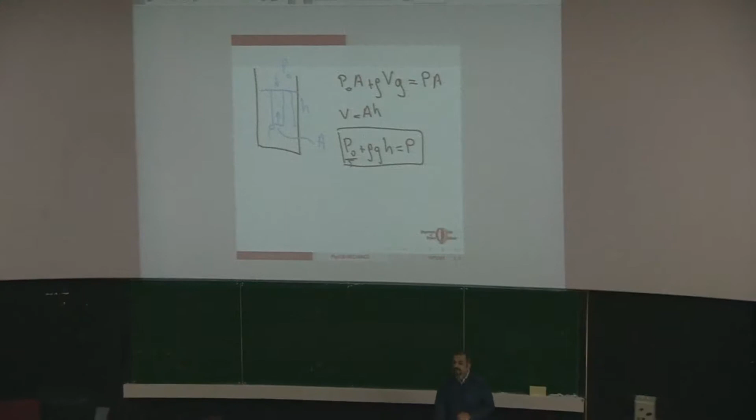Any questions about the things we have done on Tuesday? Remember, we started studying fluid dynamics. We started with some simple stuff. We had mainly dealt with the pressure, what we mean by pressure, what is the definition of pressure, how we can calculate the pressure, and then we had some applications of the pressure, like the buoyancy. Why do objects float on liquids?

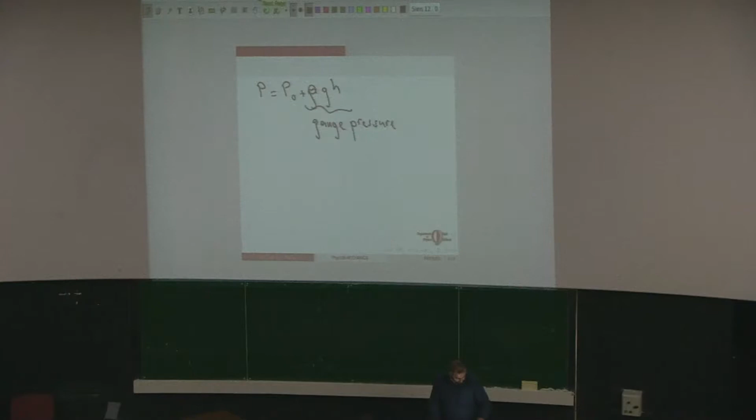And we calculated that, for example, a typical aquarium, a large one, does need to support hundreds of kilos. And then we discussed the buoyancy, why do objects float, how do ships work.

Did anybody go to the civil engineering department to see the boat made of concrete? Well, we had some architects in the classroom, even they didn't go apparently.

Okay, so today I will try to cover mainly 2 subjects. One is the hydraulics. So if you are driving a car, unless you are driving a car from the 60s... did anybody drive a car from the 60s or even from the 80s? So you drove, okay, so you are quite familiar with the cars.

If you have driven a car from the 80s, my father-in-law has a car from the 80s, it is as good as going to the gym, because your muscles have to work a lot. You are doing the actual muscle work to rotate the wheels in the car. But in the newer cars, you can just rotate the wheels with the tip of your finger. It's so easy to rotate them. And the reason is the hydraulic system.

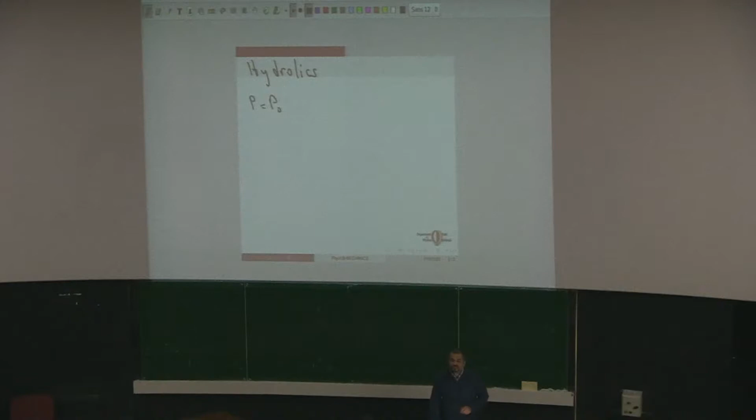We had already covered the basic idea. We had seen that the pressure in a fluid is always the pressure at some reference point plus the density of the liquid times the gravitational acceleration times the difference in the heights of your reference point and the point at which you are calculating the pressure. And it is actually the height. These 2 points can be at completely different points. They don't have to be at the same horizontal position. One can be here, the other can be right over there.

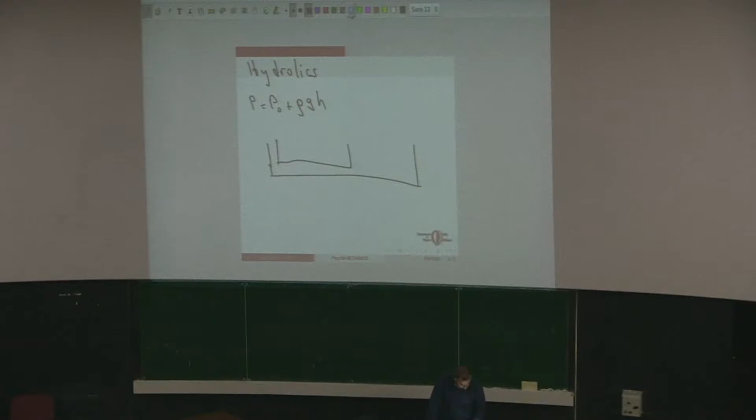So imagine such a system, and it is filled with liquid. This is your liquid system. Let's just assume that they are at the same height. They will be at the same height in equilibrium.

Now, take this point and this point, let's call this point A and this point B, and consider the points on the opposite side. Let us call this point C and this point D. Let's assume the differences in the heights of points C and D and A and B are equal. This is H, and this is also H. The differences in the heights are the same.

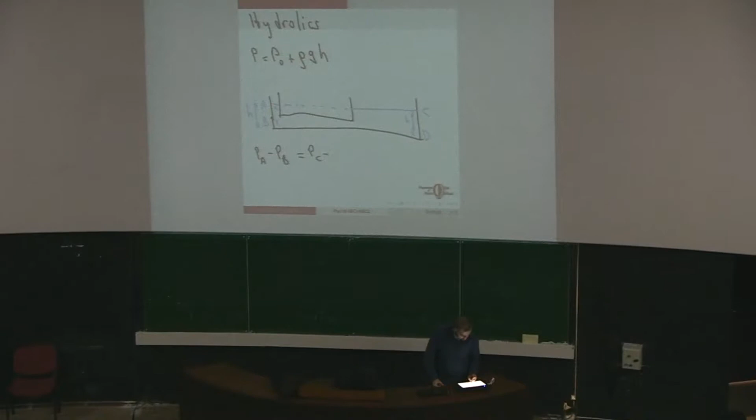Now, we know that the pressure at the point A minus the pressure at the point B, remember the difference in the pressure at two different points is always given by H, the difference in the heights. So this difference is equal to the pressure at the point C minus the pressure at the point D. Since the difference in the heights of this point and this point is the same as the difference in the height of this point and this point, PA minus PB is equal to PC minus PD. The pressure differences are the same.

But we also know one more thing. Remember, you can just imagine this block of liquid. I'll just imagine this is a horizontal line. Just imagine that the bottom part of this liquid is also horizontal. So this block of liquid is horizontal. It is not moving in the horizontal direction. So the force at this point and the force at that point should be equal. But that means the pressure at this point and the pressure at the other point has to be

equal. So we also know that pressure at the point B should be equal to the pressure at the point D. B and D, they have to be equal. So this equation tells us that the pressure at the point A and the pressure at the point C are also equal.

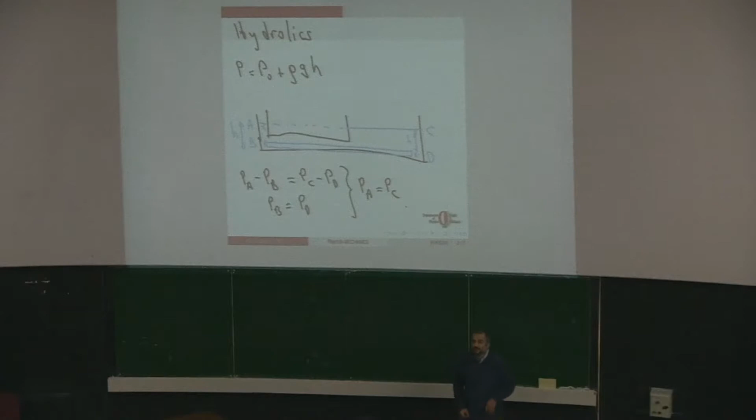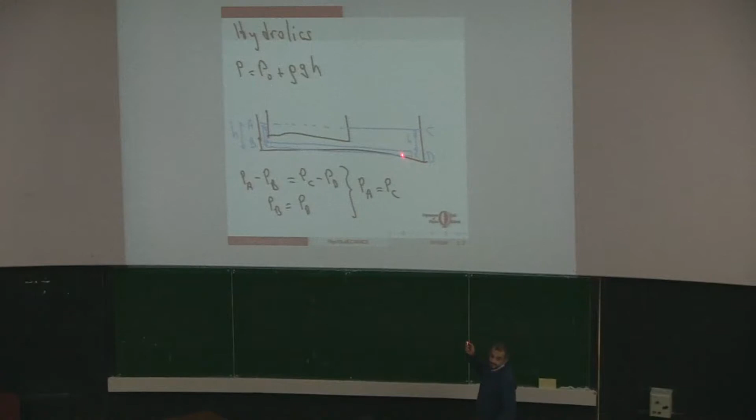Well, what we are essentially doing is to show such an identity. You just start from the point A, you imagine such a block, and relate the pressure at the point A to the pressure at the point B, and then you use this block of water to relate the pressure at the point B to the pressure at the point D, and then you use the last block of water to relate the pressure at the point D to the pressure at the

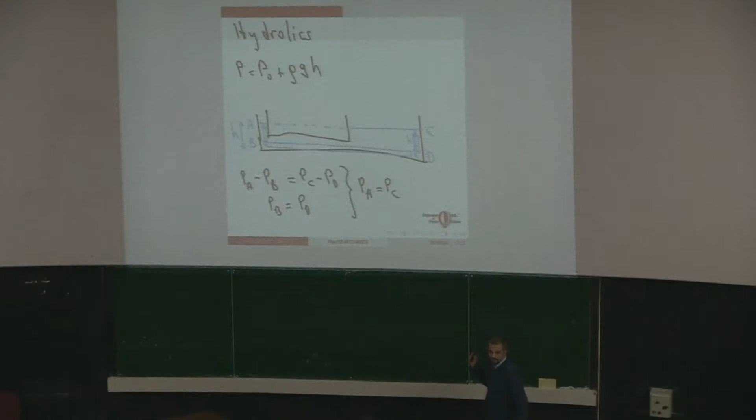point C. So as long as two points are connected by some water, as long as you can swim from one point to the other point through the water, it just means that the pressure difference is only determined by the difference in the H. One point can be here, the other point can be over there. There's no problem with that. Okay, although it seems kind of obvious, it will have important consequences.

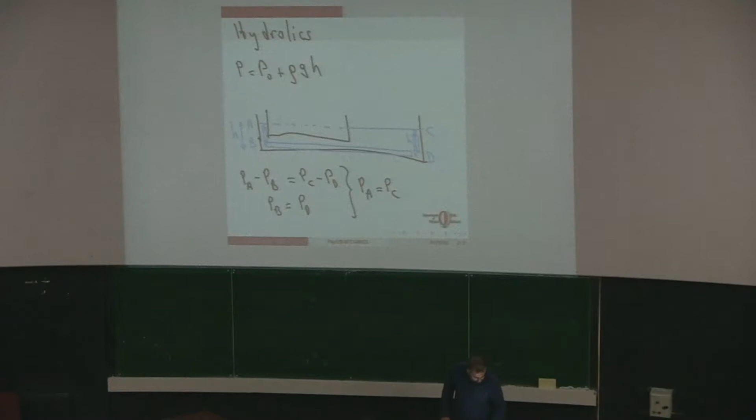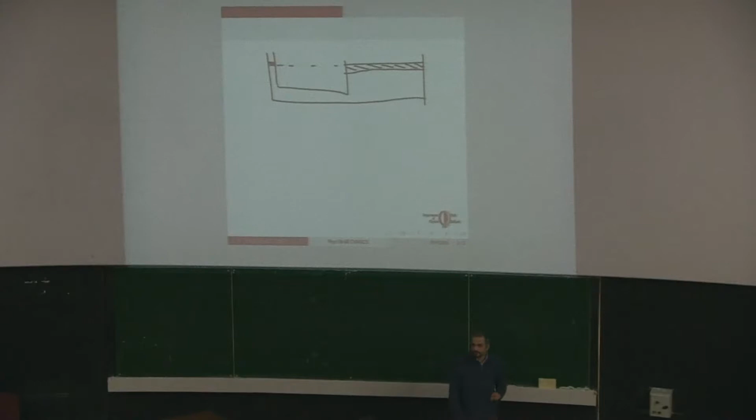So let's just take this example. So you have a small opening and a large opening. They are both connected by a fluid. So you imagine that you have a piston over here and another piston at the same height. So they are both at the same height. It is filled with liquid.

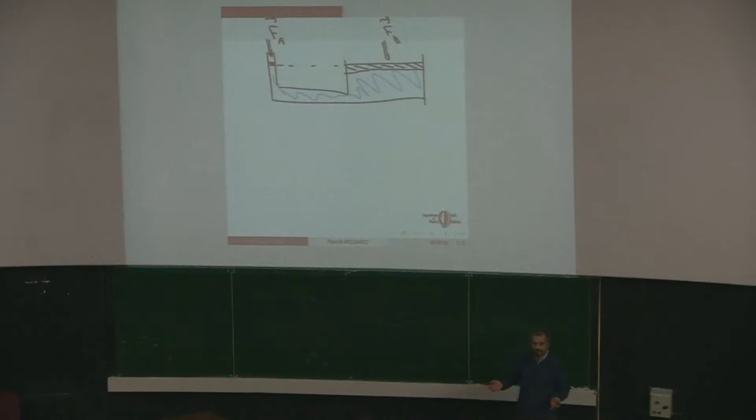And let's say you apply some force over here. And you exert another force on the other side, and let's just assume that these two forces are balanced. So the system is at rest when you exert a force Fa on the left-hand side and you exert a force Fb on the right-hand side.

Now remember, the pressure at any point is always P0, the reference pressure, plus rho g h. Now in this case, h is 0. So we will just set this point to have h equal to 0. So this term is 0. So the pressure at that point is just the reference pressure. The reference pressure, we have the atmospheric pressure.

So this is the additional force that we are exerting. There is the atmospheric pressure, which will exert some force, plus we are pushing it down by some additional force, Fa. The same holds over here. There is the atmospheric pressure plus this additional force, Fb. Now, Fa will increase the pressure over here by Fa over A1. Let's just call it the area 1. Okay, this has area A1, and this piston has area A2. So this is the system we have.

So if you imagine this system, now Fa over A1 will be the increase in the pressure of this point, right below this piston. But if the system is balanced, everything is at rest, the liquid is at rest. Now if the liquid is at rest, the pressure at this point and the pressure at this point should always be the same. If we are increasing the pressure over here by applying a force Fa, that increases the pressure here.

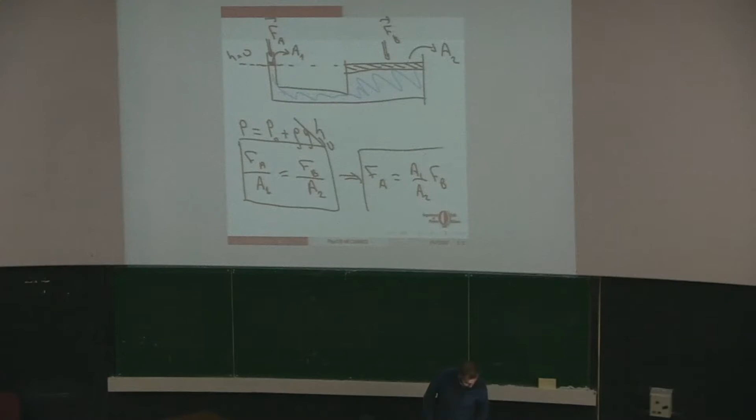Now, if we want to keep the system at rest, we should exert some force over here, Fa, and Fa and Fb should be related in this form. So this, you can imagine, is your load, and this is the force that you exert. So the force that you need to exert, Fa, should be equal to A1 over A2 times Fb. This is the force you need to exert. Now, the Fb is your load. There might be several different loads.

That's not something that you can really control, but when you are devising such a system, A1 and A2 are the things that you can control. And you might make sure that A1 is a small area, A2 is a large area. You can construct your system in such a way that the force that you need to apply to balance an object can be much smaller than its weight. Now this is the critical thing over here.

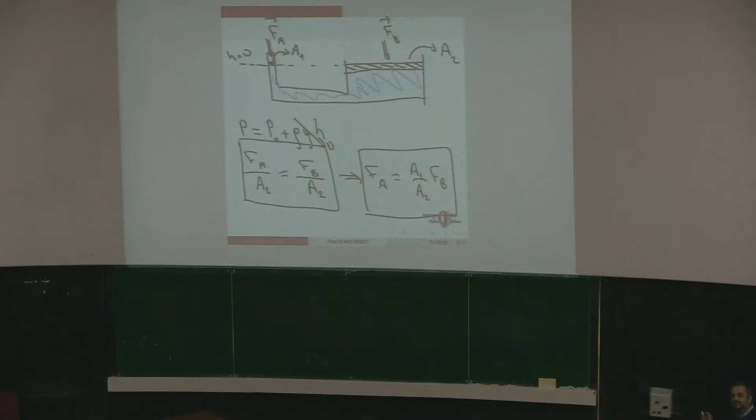So it might be that here you have, let's say, an object that is 100 kilos. You need 1,000 Newton to balance it. If the ratio of these areas is 1 to 100, if you just put 1 kilo over here and 100 kilos over there, they will just balance each other. So it is just a lever system. If you remember, in the lever system, if one side is very long and the other side is very short, with a very small force on the long side you can lift a very heavy load on the short side. This is exactly the same system. You have a short side and a long side.

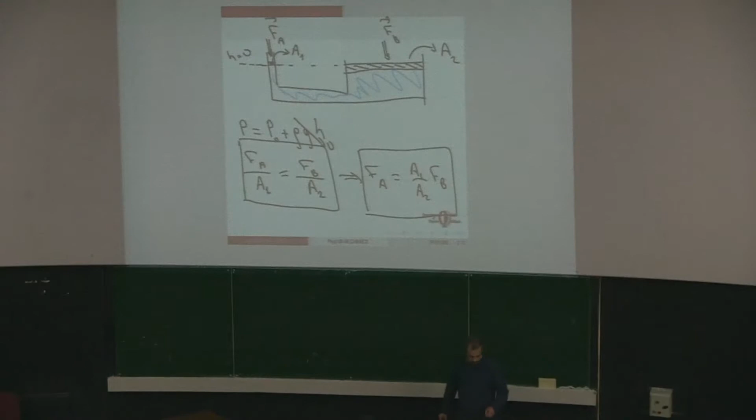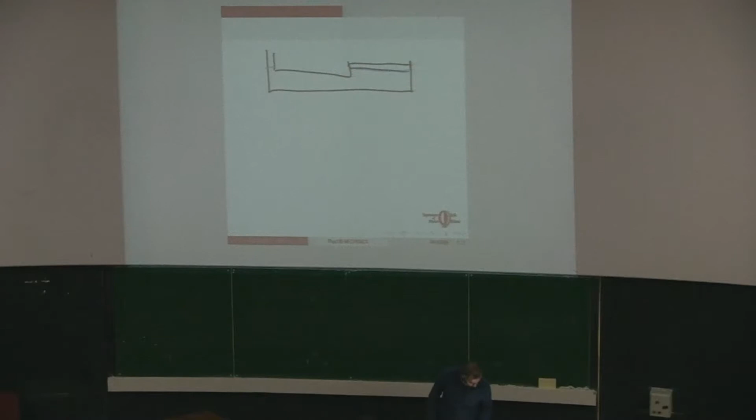Of course, if you want to lift the car by 10 meters, just imagine you have this system. So you have this system filled with liquid. You have pistons on top. This area is A1, this area is A2, and A1 over A2 is equal to 1 over 100. Now, in this case, if you put a load M2 equal to 100 kilograms, and here you put another load M1 equal to 1 kilogram, the weight of 1 kilogram will balance the weight of 100 kilograms.

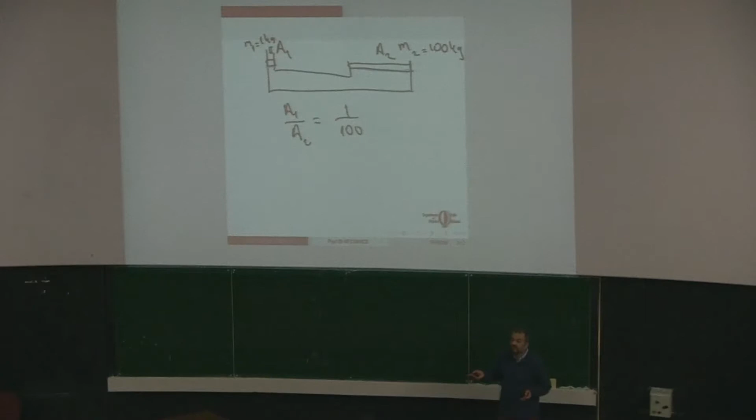But there is a price you pay. If you want to lift the second mass by 1 meter, you have to push this first mass 100 meters. You are exerting a smaller force, but you have to displace it much further if you want to create some displacement on the large mass. It is just the conservation of work, the conservation of energy. The work that you do here and the work that is done here should be equal. If you are exerting a force that is 1/100th of the other force, then the displacement you need is 100 times more. Okay, any questions on this one?

Now, this subject I would like to pass fast, because there is another subject which I would like to cover, which is more interesting and a bit more complicated. This one. Then this will move by 100 meters. Yes.

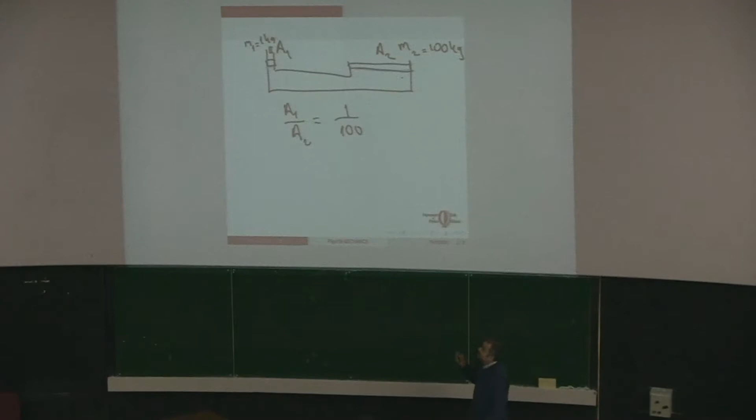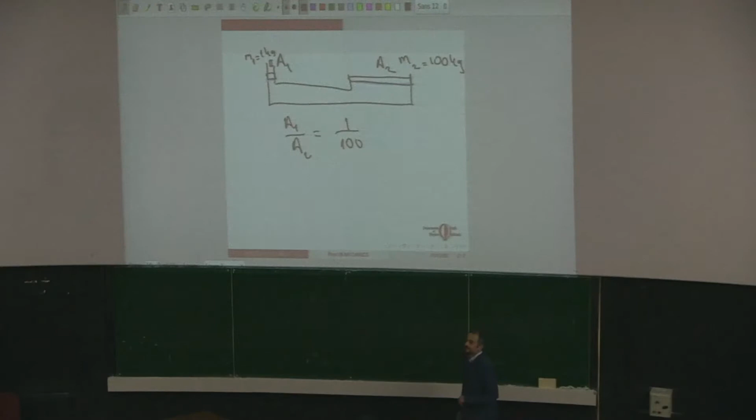Now, up to now, we have always dealt with liquids at rest, or almost at rest. In this case, if you are pushing this, of course, the liquid is not at rest, but it is moving very slowly. Now we will start the subject: what happens if the fluids are not at rest? Now, in this sense, is air a liquid or a gas? In some aspects, it's a gas. In some aspects, it behaves like a fluid. So let's first discuss the fluid aspects.

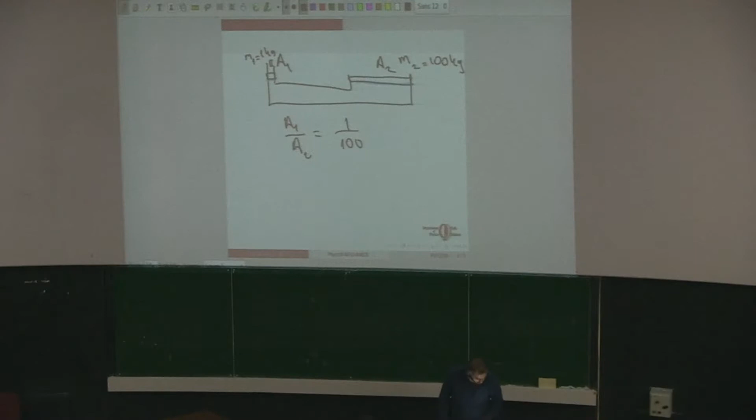Ooh. Okay, so let's see how my internet connection is.

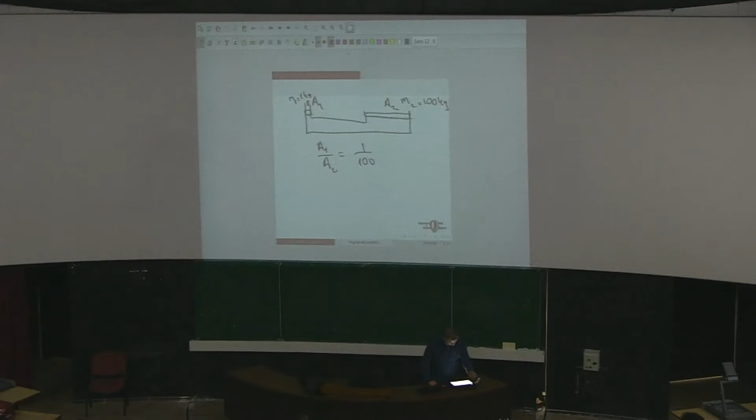So let's see. Now, first let's start: what is laminar flow? We had seen an example of a laminar flow versus the turbulent flow. I'm not sure that this is the right way to spell it.

So for those who have taken an airplane... is there anyone of you who didn't take an airplane yet? Okay, are you afraid of flying? Well, I am.

But there are some moments while you are flying that the plane just falls. As you are flying smoothly, suddenly it is as if the plane is making some free fall downward. It falls a few meters. That is also called turbulence, because while there is a laminar flow, there is a lift, a force pushing the airplane upwards. But when there is turbulence in the air or caused by the plane, that force drops significantly and you start dropping until you leave the region where the turbulence is.

And you might have also realized that turbulence happens most frequently when there are clouds around, because the clouds modify the homogeneity of the atmosphere in that region, and that usually causes the turbulence as you are moving. The properties of the atmosphere around you are changing, so the force acting on you is changing. That's why you get all this turbulence and you just jump up and down.

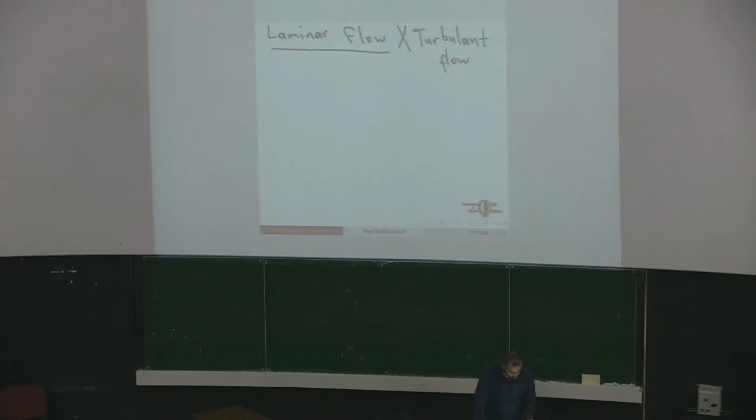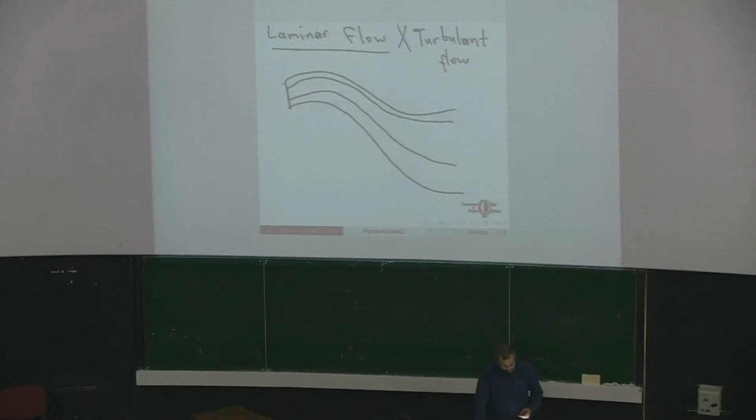Now let's just talk about the laminar flow. If you put some fluid over there, it will just flow smoothly to some other point. If you put some other object over here, it will flow smoothly. It will not intersect the first one. Or you put another object over here, it might flow smoothly and come over there. Another object might flow smoothly and come over here. So if you imagine that you started from this line, you might end up having your objects lying on this line.

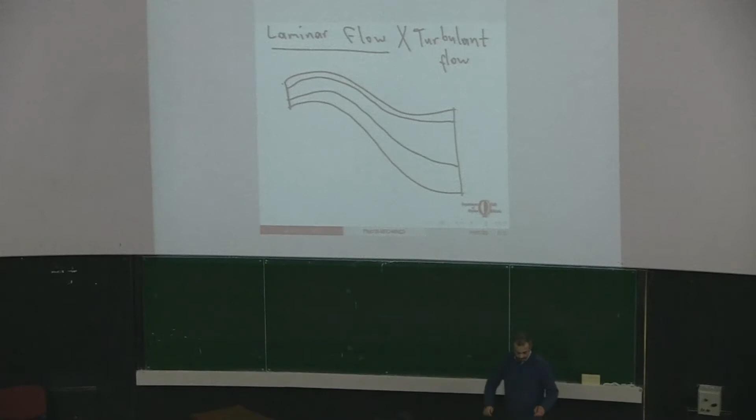The area might change. You see, you might put objects very close to each other, covering almost an area in the fluid. And as the fluid moves, those objects can move away from each other, and the area might enlarge if the flow is in this direction. Let's say the flow is in this direction. This is the direction of the motion of your objects.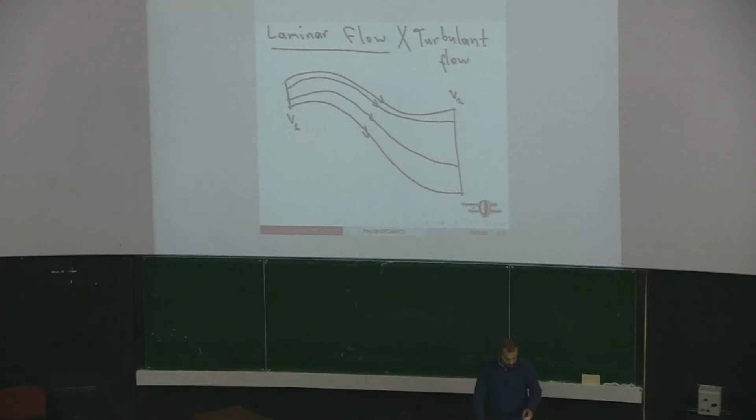Now here, the fluid might have some velocity, some speed v1, and on the other side, it might have some speed v2. The speed of the liquid need not be the same throughout the fluid. Now the area here is, let's call it A1, and the area on the other side is A2.

Now just imagine a very small amount of time. So in this very small amount of time, what will happen is this area, if you just put some specks over here, it will just move a very small distance. So it will come to this point. And this is the volume over there. Now the length, let's call it L1, is nothing but V1 times dt in a very small amount of time.

Now if you consider the other side, this side will move in this direction, and the thickness of that side will be just V2 times dt in the same amount of time. So this part moves over here, this part moves over there. But the mass, so let's see, if you just take this area, this volume, now the mass that comes in should be equal to the mass that goes out.

We are of course assuming that, well, since these lines cannot disappear, they cannot cross each other, the mass here should be always constant. So the mass inside has been increased by the mass over here, and it has been decreased by the mass over here. If there's mass accumulation, then the question is for how long will the mass accumulate? If the mass is constantly increasing over there, eventually you will have all the mass of the universe inside.

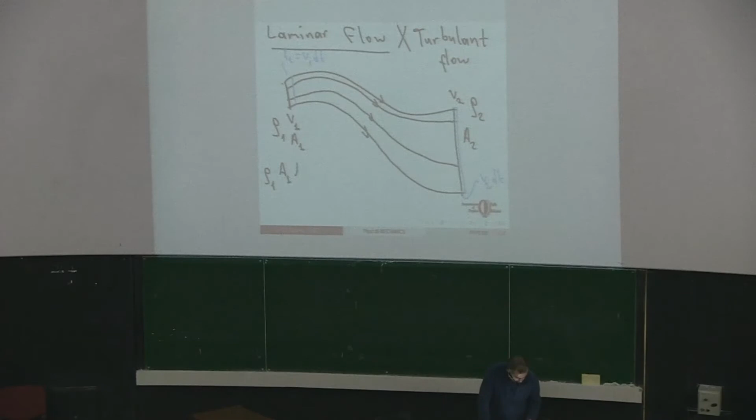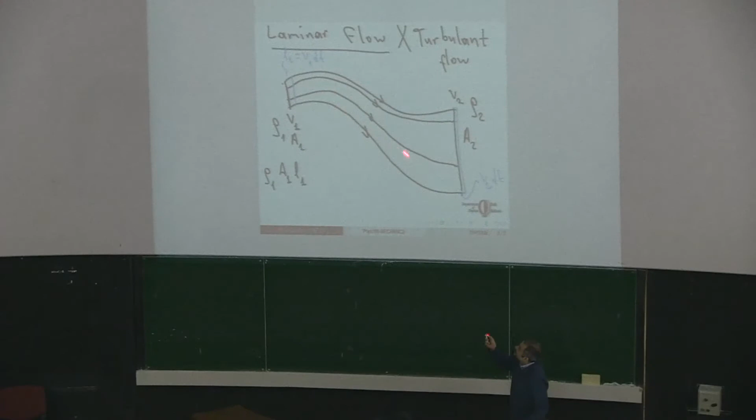Now ρ1 times A1 times L1. A1 times L1 is the volume over here. The volume times the density is the mass. So this is the mass over here, the mass that enters into this region. And the mass that leaves that region is ρ2 A2 L2. So these two things have to be equal. This is what we call the continuity.

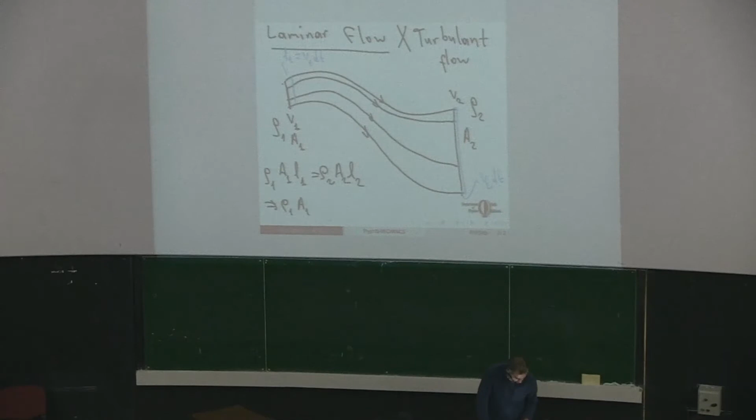Well, L1 is V1 dt, and this is L2, V2 dt. So this means that ρ1 A1 V1 should be equal to ρ2 A2 V2. This should hold as long as the liquid is flowing in a stationary state. The liquid is not changing in time. There is no accumulation of mass at any point.

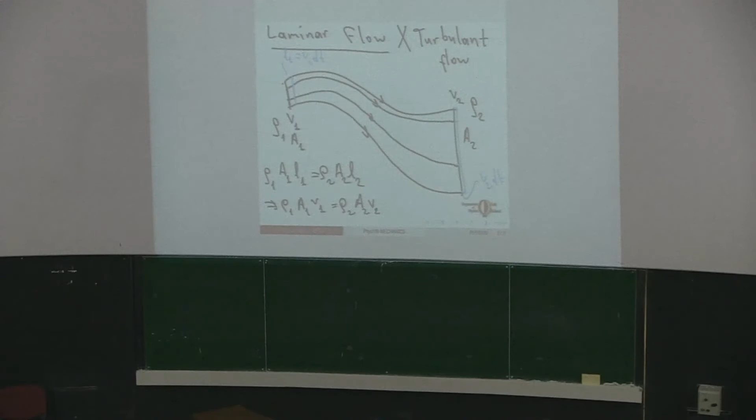So here we have already assumed that the mass inside that volume is not changing. So we are assuming that no mass is accumulating in that region. So the mass that comes into that region should be equal to the mass that goes out of the region. So this is what we have. ρ1 A1 V1 is equal to ρ2 A2 V2.

Now, if you are talking about a gas, the density of the gas can be changing from point to point. The variations in the density of the gas can be significant. So ρ1 and ρ2 can be really different. But for a liquid, ρ1 and ρ2 are more or less the same. So we can just assume that ρ1 is equal to ρ2.

Now, if the densities are the same, it just means that you cannot really compress the liquid. This is what we are assuming. So we are assuming that the system is an incompressible liquid. Well, any object is compressible to some extent. But in this case, we are just ignoring it.

Compressible, we mean that if you take some mass of an object, you can change its volume without changing the mass. So you can change the density for any object by just exerting some additional pressure. You can squeeze objects. If you squeeze the objects, you are increasing the density. But if ρ1 is equal to ρ2, that is, if we are in the incompressible region, this means that A1 V1 is equal to A2 V2.

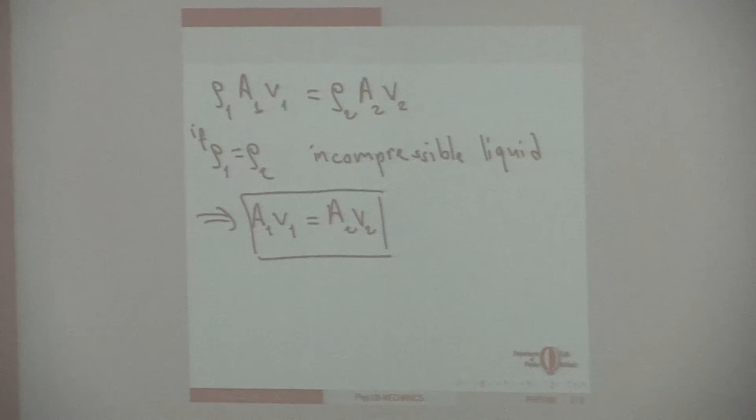But if the water is very slow, it cannot carry all the mass that it has been carrying when it had a larger velocity. So all the mass that it had gained while it was flowing very fast is deposited in the openings to the sea. And then by just accumulation of all this mass, you get the formation of the deltas. Question?

Yes, exactly. Because when you are squeezing the mouth of it, you are lowering the area. So just imagine that this is your water hose. The water has some velocity and some area over here in this part, so you are not changing that. What you are doing is you are just squeezing the tip. If you squeeze the tip, well, let's see, A1 V1 is just constant.

You are reducing A2 by squeezing the tip. So V2 has to increase. So the water jet should exit the water hose with a larger speed. If it has a larger speed, it should go a farther distance. It's exactly that one. Okay, yes.

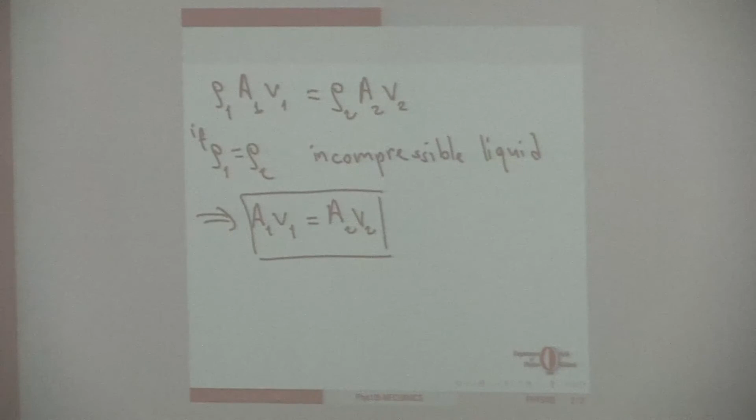This one. Now, because L1 is equal to V1 dt, L2 is equal to V2 dt. Well, that color is hard to see. L1 is equal to V1 dt, L2 is equal to V2 dt. So I'm just assuming that I observe my liquid for a very small amount of time. So all this volume over here

Now, in a very small amount of time, all this volume over here will enter this region, and all the liquid in this volume will exit the same region. So here I just assume that the mass of this region is constant during this process, since I'm assuming that everything flows in a stationary state, nothing changes in time. Of course, the water flows, but when I look at the water, I see the same thing now, I see the same thing 5 minutes from now.

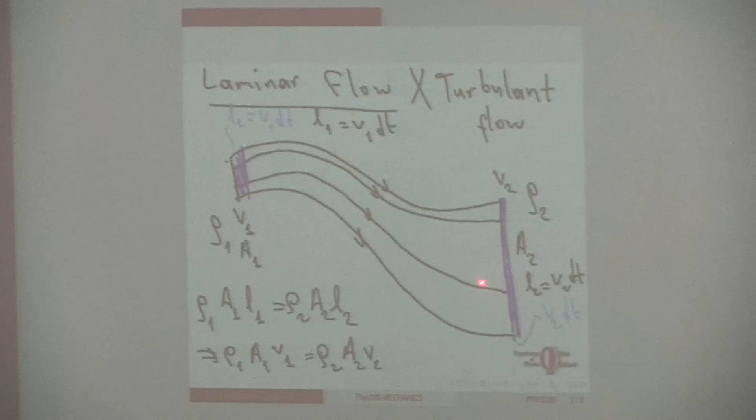So the amount of mass in this region should be the same. That is my assumption. That is the system I'm studying. So the mass entering this region and the mass exiting that region, they should be equal. It is this expression. But this is in a time dt. I divide both sides by the same time dt. So this is what I have. Yes?

Exactly, that's the point. I'm just saying that rho 1 times, this is the equality of the masses. Rho 1 and rho 2 can be equal. That means if the masses are equal, the mass that comes in and the mass that goes out are equal, and if the densities are equal, that means the volume that enters into this region and the volume that leaves that region, they should be equal.

Well, the volume is A1 L1. So A1, the area here, times this side, L1, should be equal to the area here, A2 times L2. So that means A1 V1 is A2 V2. Any other question?

Now, in the next hour, we will be studying Bernoulli's principle. So have some coffee.